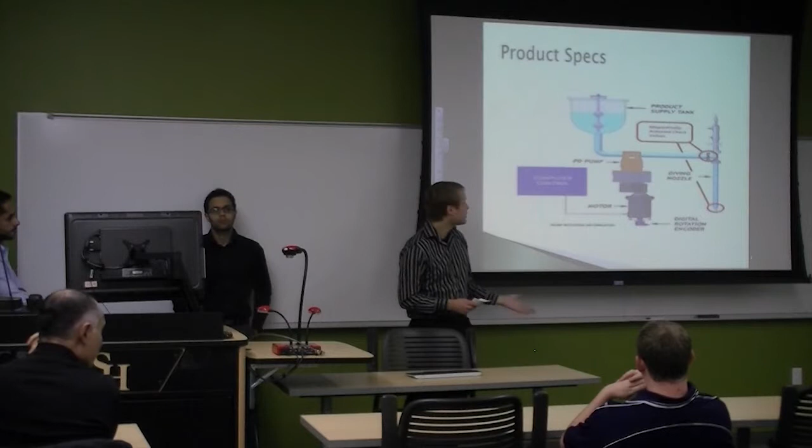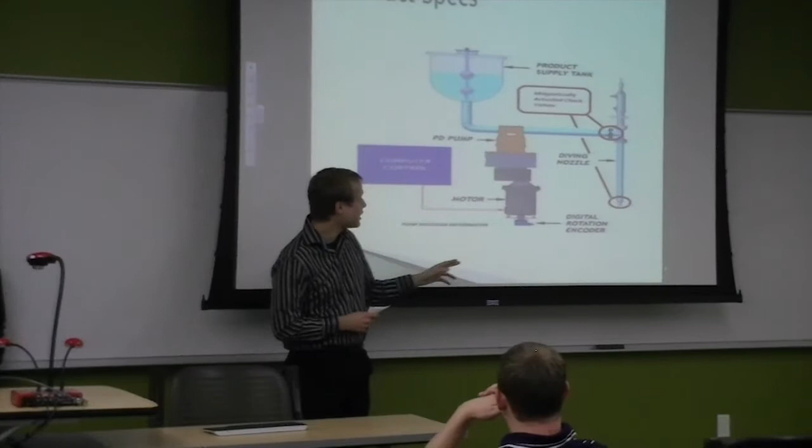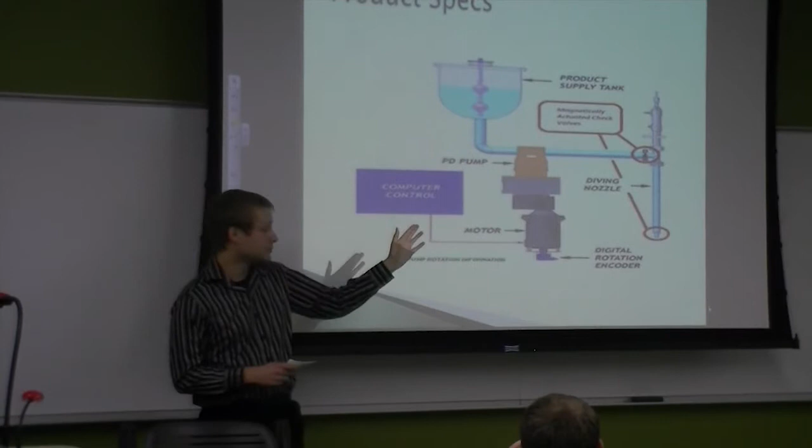Liquids would be put in the storage tank, and a computer would communicate to the motor, and then use the pump to direct the fluids through the valves. There would be magnetic check valves between the pump and the diving nozzle, and then one at the dispenser. As fluid moves through them, they'd be filtered of any metal particles.

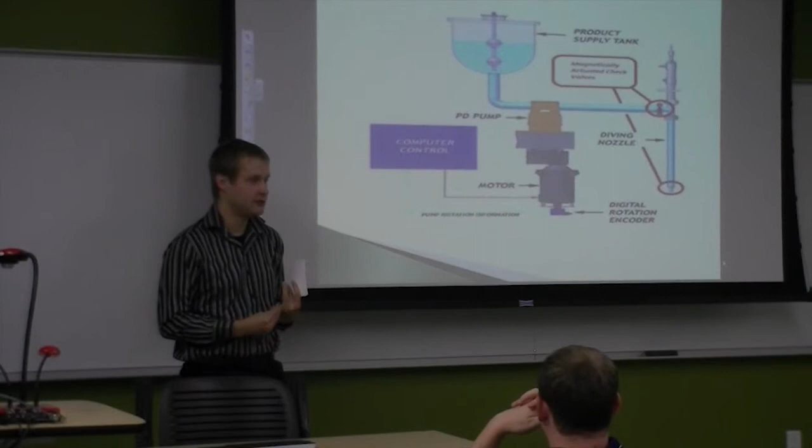Now, researching our product on PatSnap, we found surprisingly there are no bottling machines currently that use magnetic check valves, so that might give us a competitive advantage.

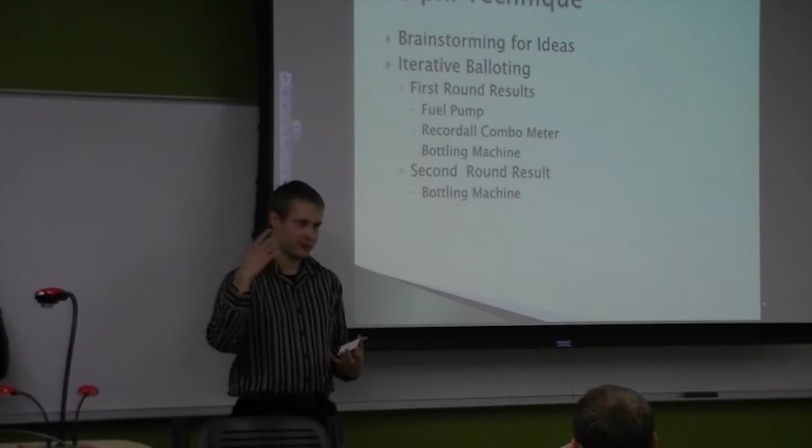Now, after brainstorming several different ideas, we decided for the first round to look at each of them and see which would be the best possible. That resulted in a gas pump, a Recordall combo meter, and the bottling machine.

The gas pump would use a computer and magnetic check valves to improve the operations and increase the flow rate, so you wouldn't have to stand there for several minutes. It's just quick. And the Recordall combo meter measures flow of water in buildings.

They generally use spring valves, so we put a magnetic check valve in there to improve reliability and actually filter. And the bottling machine would be very similar—the magnetic check valve would be used on the bottling machine.

And then looking into the final round of voting, we decided which option would be more realistic, and we decided that the bottling machine would be more plausible.

Now, we found through our first round of voting, the gas pump wouldn't work. The EPA has set guidelines for only 10 gallons per minute, so that would take away any competitive advantage we'd have with the gas pump.

For the final two, the combo meter and the bottling machine, we first took a look at the industries. We found that the combo meter, which is within the smart meter manufacturing industry, has a faster growth rate, but compared to the bottling machine, which is in the power tools and other general purpose machinery manufacturing, they have a larger revenue—36 billion compared to the 1.5 billion in the smart meter. So that we saw as more attractive.

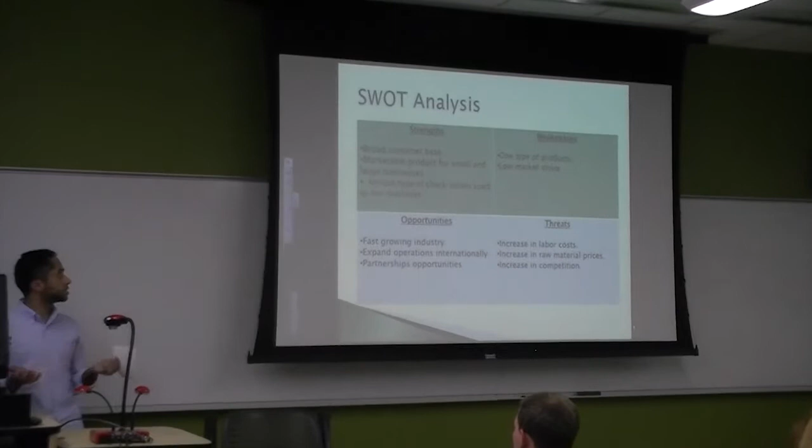Now we'll talk about the SWOT. We believe that one of our strengths is that we'll have a broad customer base. The product we offer will be sold to many different businesses and industries, including pharmaceutical, cosmetic, dairy, chemical, food and beverage businesses. Moreover, the product we offer is marketable for small and large businesses.

Another thing is that the unique type of check valves we use in our machines will differentiate our product from what main competitors offer. It'll make the process of using our product more efficient and reliable.

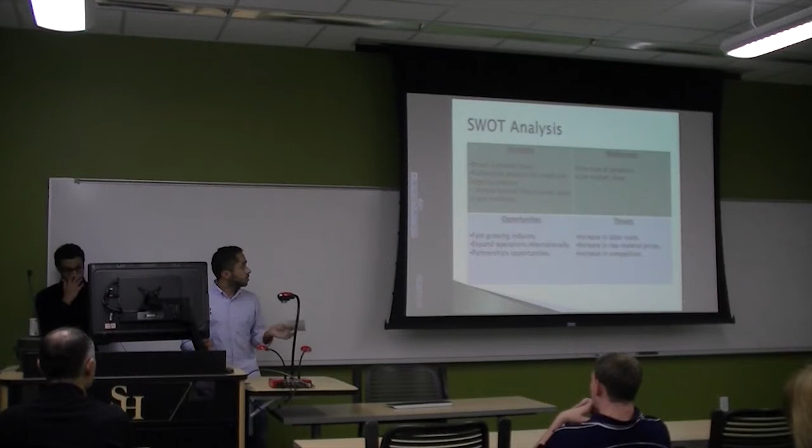Talking about the weaknesses, we do have a couple. One is that we offer one type of product. Even though it's offered to many businesses and industries, any decrease in demand will affect our sales and market share. Another weakness is that we will have a low market share since we just started operations. Most companies in the industry have been around for a while, allowing them to build a large customer base and high market share.

Talking about opportunities, the industry we are in is fast-growing and expected to grow in the next years. Moreover, we can expand our operations internationally, which will help build a well-known global name and increase our sales and market share. We also have partnership opportunities with existing companies in the industry.

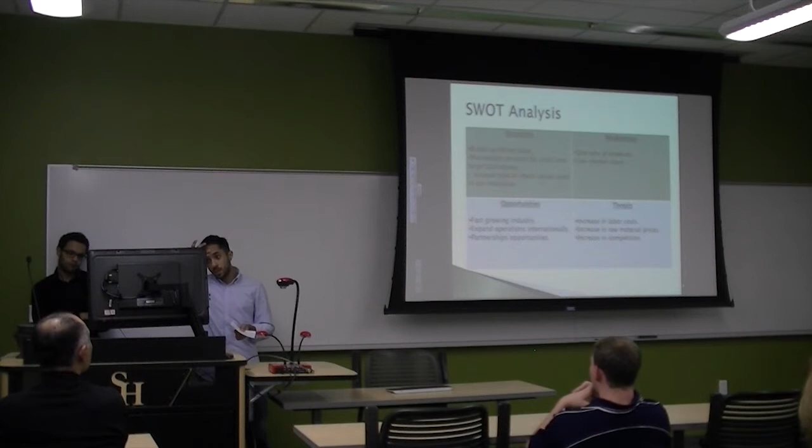Talking about threats, there might be increases in labor costs, and raw materials are also increasing. Since we just started, any increase in expenses will affect our sales and profits. Moreover, there is a huge increase in competition, as companies are always investing in research and development, so we believe we should also invest more in research and development to compete with competitors.

In conclusion, we believe that our product is more reliable, efficient, and durable than what main competitors offer. We believe we'll also have high amounts of sales and build a high market share in the future. We just need someone to invest in us. If you guys have any questions.

I was noticing that when you were talking about the reduced cost of materials and the increase, it was like 18.5, I believe. So what you're saying essentially is that there's a 3.5-year payback period? Is that right? Yeah, it's about that.